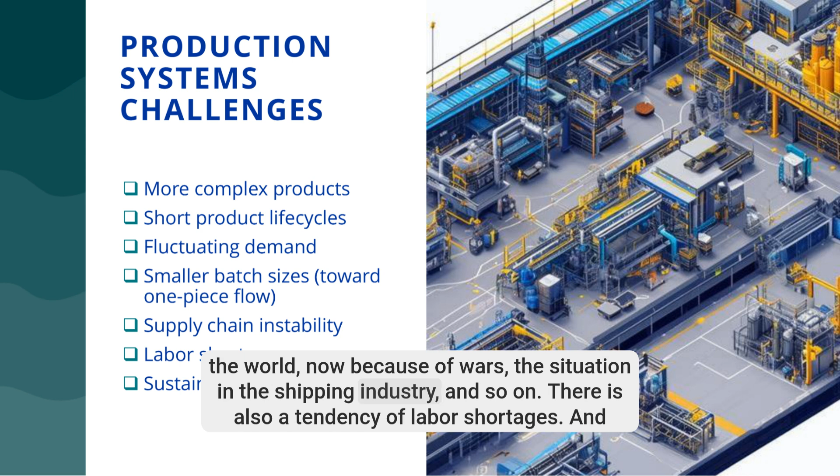Then we have supply chain instability, such as different disruptions of supply chains around the world now because of wars, the situation in the shipping industry, and so on. There is also a tendency of labor shortages. And finally, there is constant sustainability pressure, meaning how to make production systems even more environmentally sustainable.

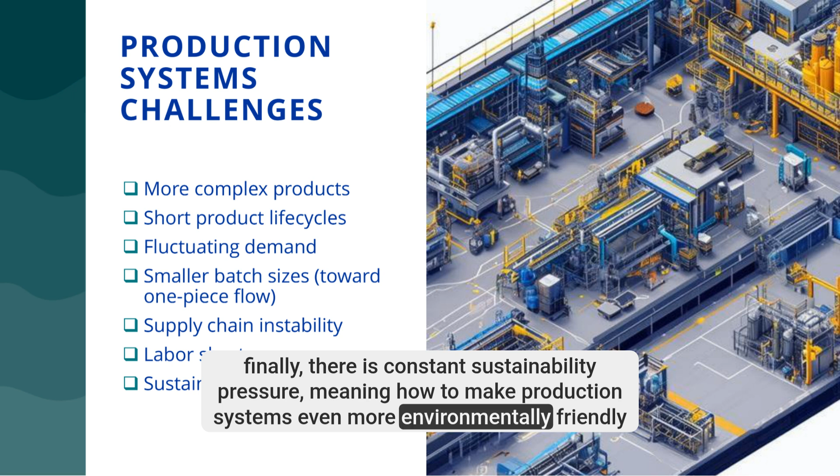So, to address these challenges, companies need to implement different technologies. These are mostly technologies that are trying to transform the system and make it more agile. And these more agile systems require a more skilled workforce, which also requires a good balance between cost, efficiency, and sustainability.

This is a great challenge, particularly for small and medium-sized enterprises, because they usually do not have enough resources to educate themselves, research, and analyze what kind of technology would be the most suitable for them, and in which way to adapt that technology. So most SMEs come to this challenge by trying to adapt themselves to the technology, instead of trying to find a technology that will really suit them and support their processes.

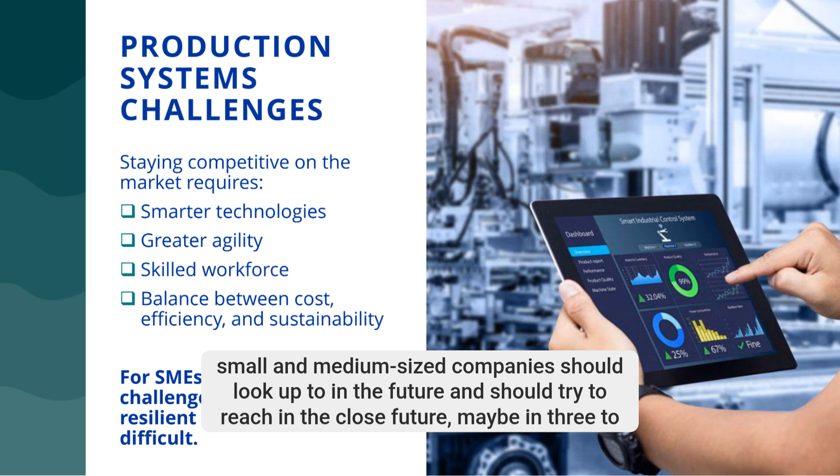One of the technologies that is currently among the top technologies on the market for optimization of production systems is digital twins. This is, I would say, not a completely new technology, but it is also not a completely market-mature technology. Today, mainly very big players on the market are using it on a daily basis. However, this is something that small and medium-sized companies should look up to in the future and should try to reach in the close future, maybe in 3 to 5 years, if they want to stay on the market.

So what does this digital twin represent? It represents a technology that enables companies to create completely virtual production systems that mirror their existing real production systems. All the changes and challenges they have in the real system can first be analyzed, tested, and optimized in the virtual environment, without jeopardizing worker safety and without spending too much money on technology before they test it. So it also comes down to test before you invest.

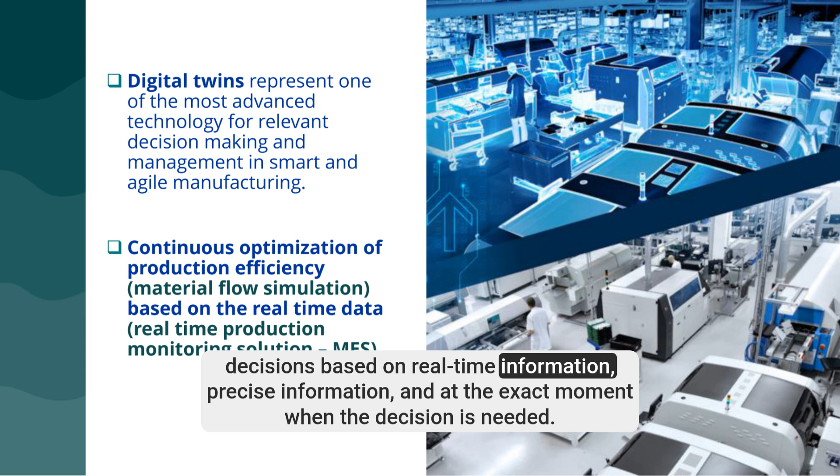They can really use these digital twins to change and examine different changes within the production system before making a real decision. At the same time, they can make decisions based on real-time information, precise information, and at the exact moment when the decision is needed.

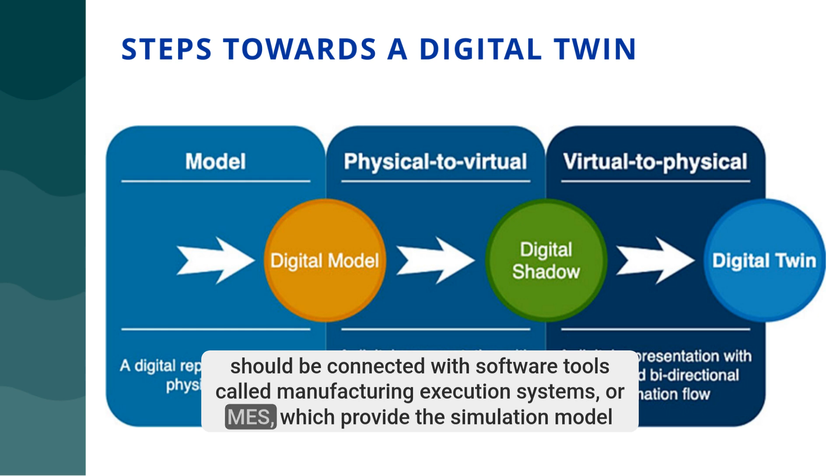To eventually reach a digital twin, a company should first start with a simulation of its production system. Later, this simulation should be connected with software tools called manufacturing execution systems, or MES, which provide the simulation model with real-time data. Ultimately, we want to have a real system operating, and a digital version of that system operating at the same time, exchanging information in real time.

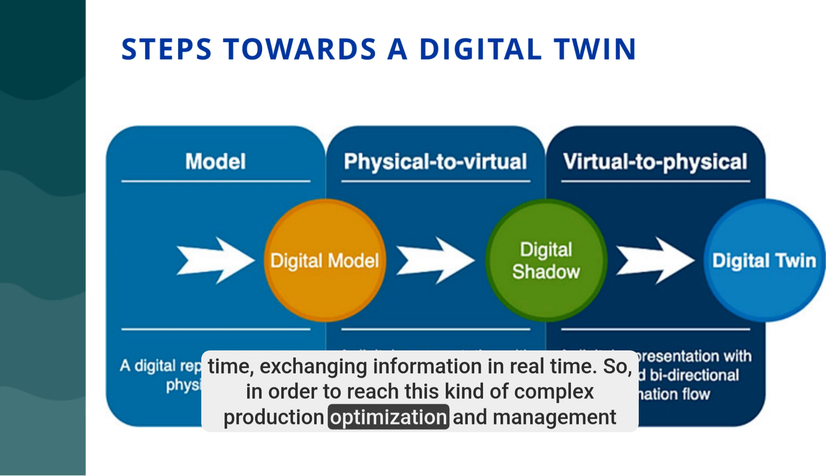So in order to reach this kind of complex production, optimization, and management system, the first step is to start by using material flow simulation to create a simulation model of the existing production and logistics system. This digital representation is first used by companies to understand how their system works, where the bottlenecks are, what the real challenges are, and how they can deal with different changes on the market and in the production system.

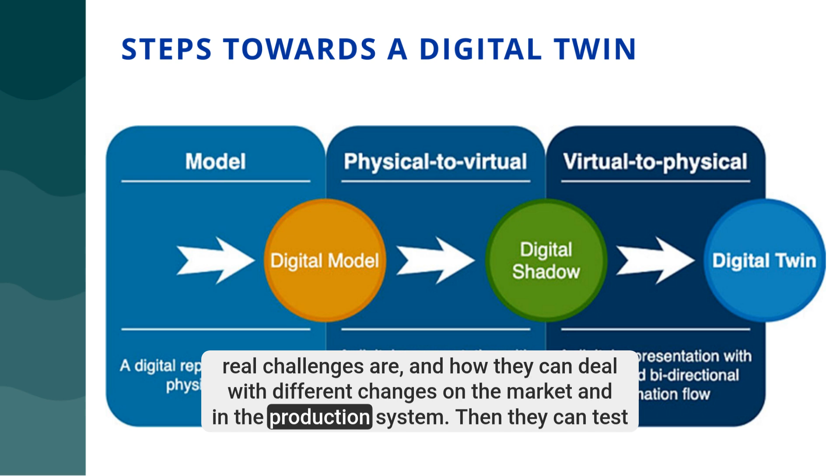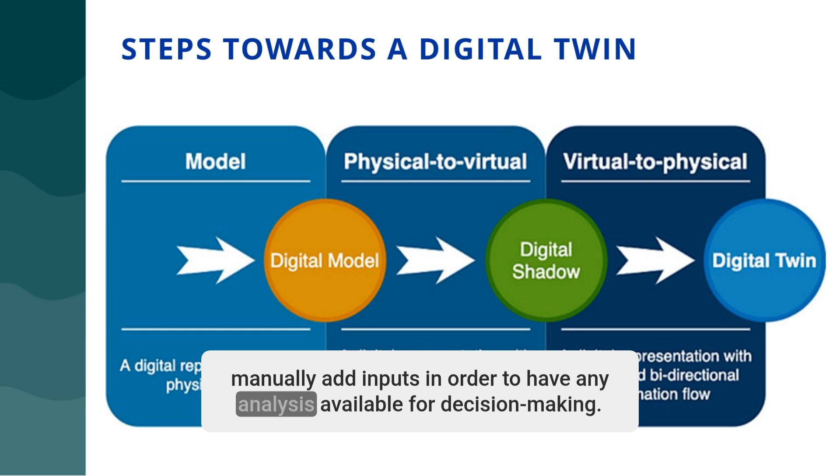Then they can test how their system would work in different scenarios. However, in this first step, when we create a digital model, we need to manually add inputs in order to have any analysis available for decision-making. This means that we manually input parameters into the system and then analyze statistically how the system behaves according to the parameters we put into it.

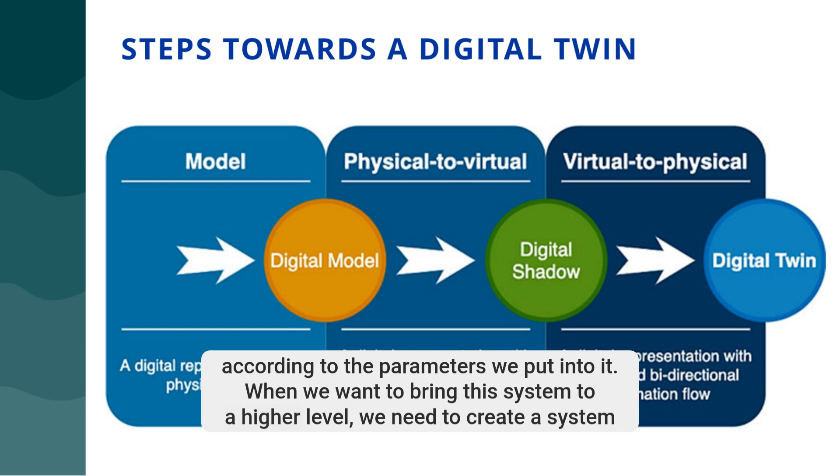When we want to bring this system to a higher level, we need to create a system that automatically takes information from the real system. For that, we need some kind of devices set up in the production system that send information in real time and feed our digital model with real-time data.

At that point, we already have something that is called a digital shadow. We upgrade our simulation model into a digital shadow once it works well, and once we can use it to monitor how the system works based on real-time data.

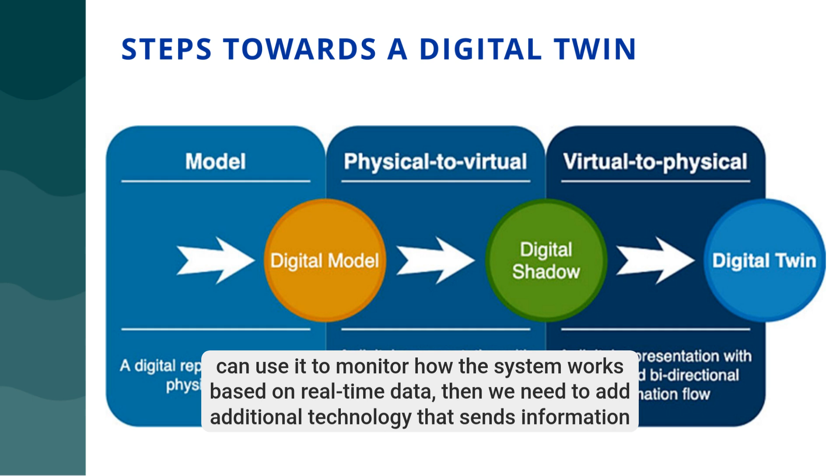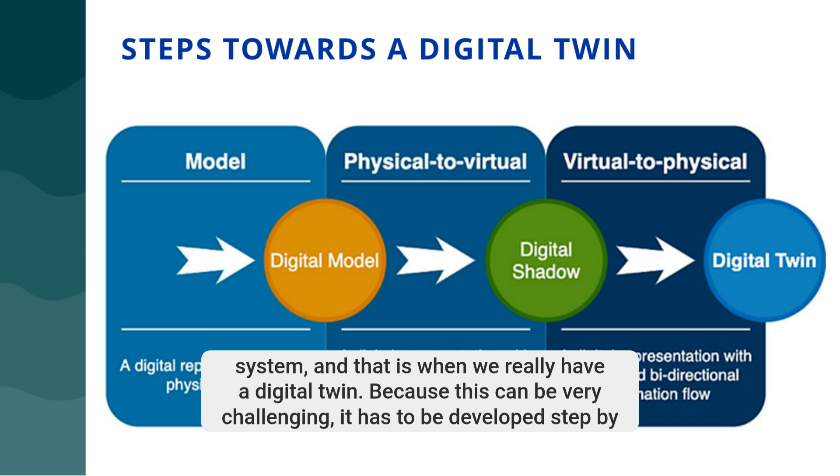Then we need to add additional technology that sends information from the digital model back to the real system. This creates a loop interaction between the real system and the digital system, and that is when we really have a digital twin. Because this can be very challenging, it has to be developed step by step.

Now we will start from the very beginning: how these simulation models are created, why they are created, how they look, and what they can help you with. The first step towards this kind of digital transformation is to create a simulation model.

This simulation model represents a digital representation of the real system. It can be used for production, logistics, or service-providing systems, so it can be applied in different kinds of industries. It can also be used for strategic, tactical, and operational planning of the system, for planning new systems or for optimizing existing ones.

That means you can create a simulation model of a production system that you already have, or of a new production line that you plan to implement in the next 1 or 2 years. The biggest advantage of these simulation models is that they answer the question: what will happen if?

This means that I can change a parameter in the simulation model and speed up the simulation process in 1 or 2 minutes. I can see what will happen with the system after 8 hours, 1 day, or 1 week, so I can evaluate how the changes I make now will influence my system in a couple of hours or a couple of days.

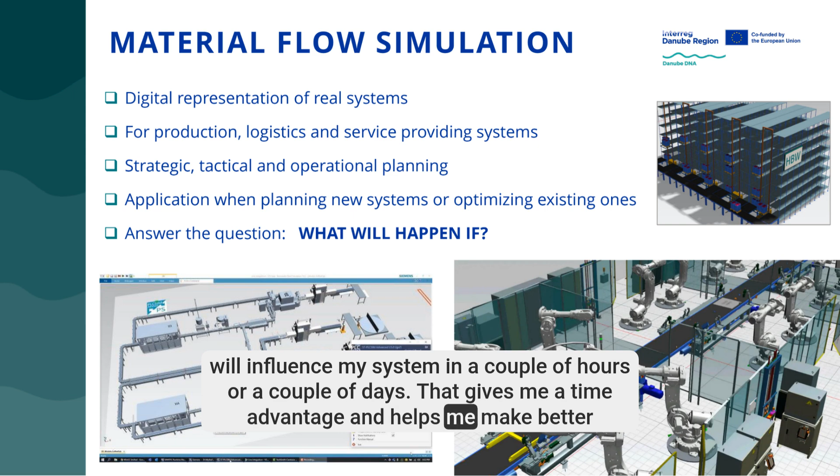That gives me a time advantage and helps me make better decisions, because I can already see how different decisions can influence my system.

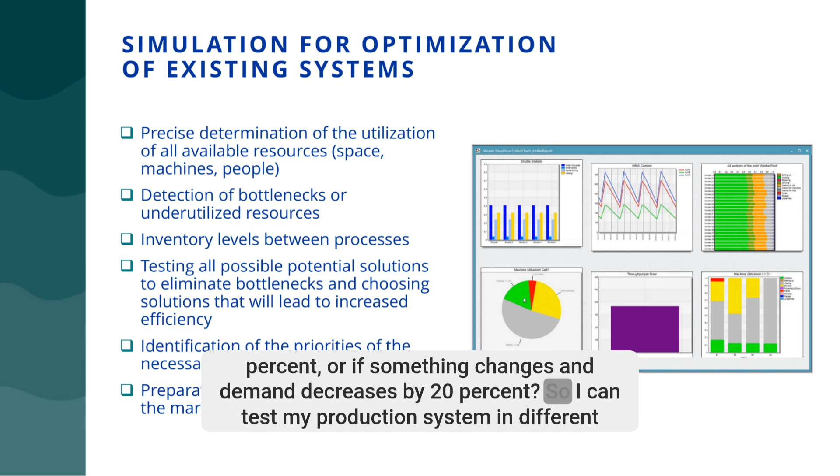Simulation can also help us prepare for extreme changes on the market. For example, what happens if demand increases by 30%? Or if demand decreases by 20%? So I can test my production system in different scenarios. Based on the simulation results, I can decide what backup plans I need to create in order to reduce the risk of problems on the market and increase my performance.

When I use simulation for new systems, the first thing I can use it for is the visualization of the conceptual solution. This means that you already have a plan of how your production system should look. But with the simulation model, you can really see how the system will look and whether you planned it correctly or whether some changes should be made.

Then you can optimize the layout. You can reduce the required space, set the machines in the right order, reduce the length of material flow, and optimize the system before you even start building it.

Simulation can also be used to compare different technologies. For example, if you have a production line and want to decide which packing technology would be the most suitable, you can test 2 or 3 technologies using simulation. The results can help you decide which technology will be most suitable in the next year, 3 years, 5 years, and so on.

It can also help you optimize the number of employees. This means that for the level of efficiency you want to achieve, you can determine the exact number of employees you need, and not only the total number, but also the specific qualifications needed for this kind of production system to work. So you can know, for example, that you need 5 engineers, 10 operators, 20 people in logistics, and so on.

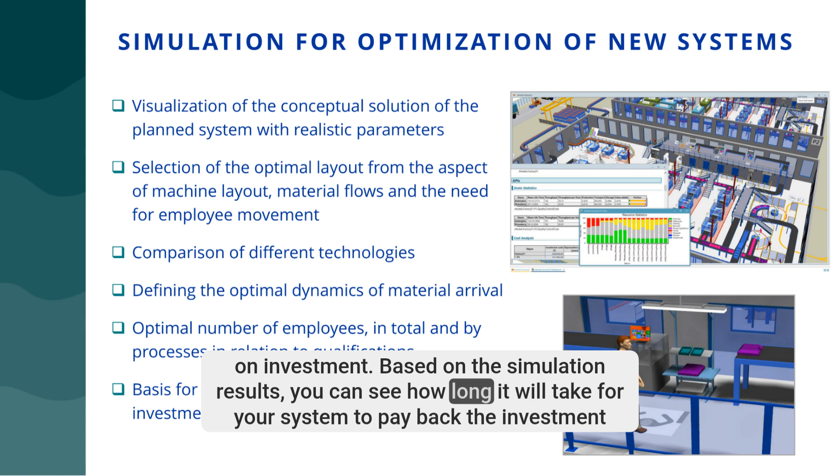Based on all this analysis, you can also create a very good basis for a realistic determination of return on investment. Based on the simulation results, you can see how long it will take for your system to pay back the investment required to set it up.

There are different software tools that can be used for creating this kind of simulation model. One of the most present and one of the best on the market is Tecnomatix Plant Simulation, offered by Siemens. This software helps you create a digital representation of any production or logistics system.

To analyze it, I will now open the software so you can see with your own eyes how simulation models of this kind of system look. Here I have an example of a simulation model. You can see that I can really work with this model - I can zoom in, zoom out, and see every specific element in the system.

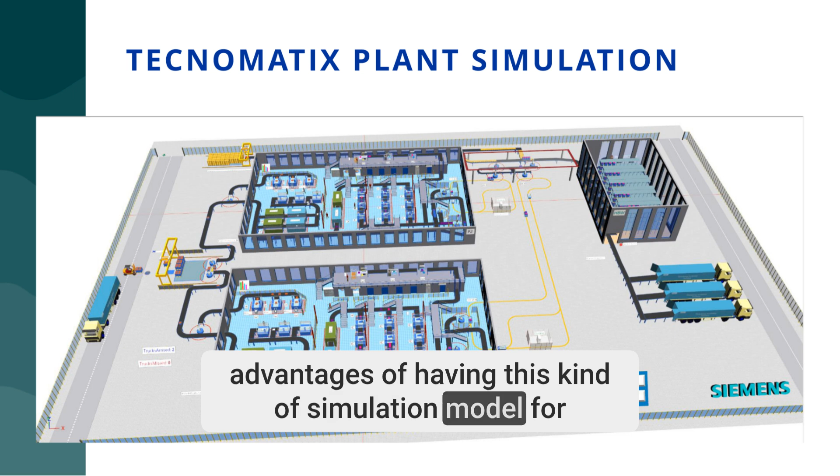One of the key advantages of having this kind of simulation model for a production system is the event controller, where I can speed up the simulation. For example, if I reduce the speed, the system starts and everything moves in real time. However, I can also speed up the process, and then the simulation runs much faster. I can let the simulation run for a couple of minutes. In less than one minute, the system simulated more than 52 minutes of work - so in less than one minute, I can see what happens with the system in one hour.

Now I can really see how each element of the system works. I can introduce different charts where I can see the efficiency of each element. I can enter each machine and see its efficiency - how much it is working, how long it is waiting, whether the material flow on this machine is blocked for any reason, how many pieces were produced during that time, what the average processing time was for each piece, and so on. So I can really go deep into the system and analyze many details.

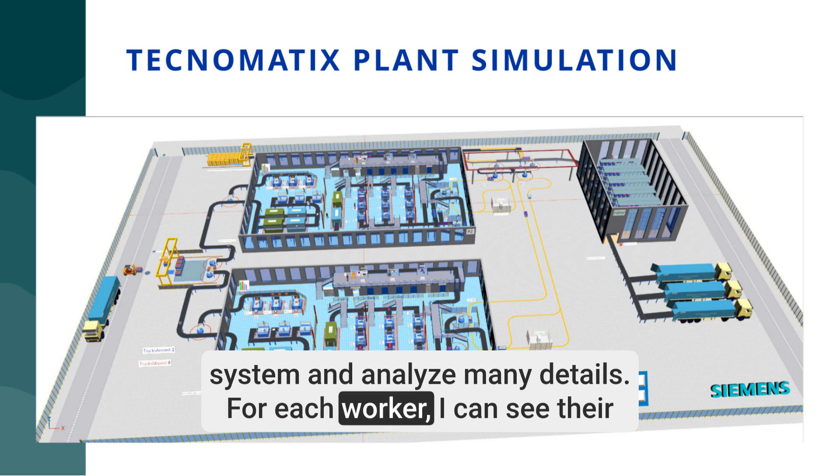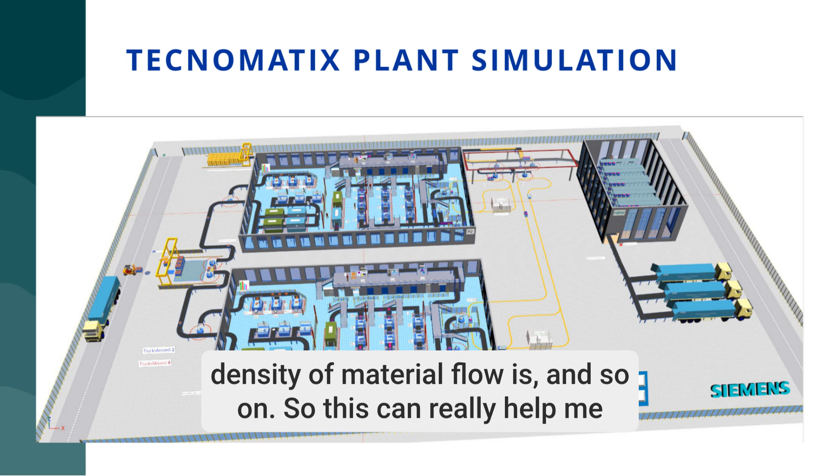For each worker, I can see their efficiency, and even how much distance they walked during a specific time. I can also see the pathways that workers used and where the highest density areas are - this can help me with layout planning. I can also see the flow of material, where the highest density of material flow is, and so on. So this can really help me understand how the system works.

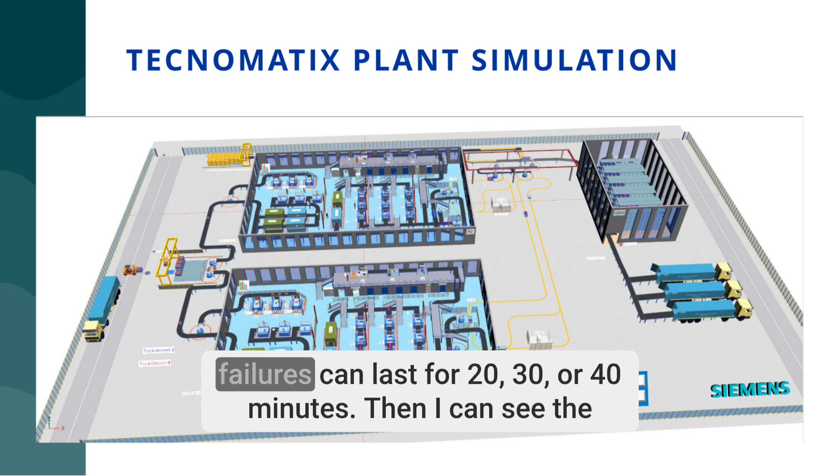I can then enter the system and change the parameters of each element. For example, if this machine was working with a processing time of 13 seconds, I can ask what will happen if I change this from 13 seconds to 20 seconds. Then I repeat the simulation and see the influence of changing any parameter on the system - whether it increases or reduces my efficiency. I can also set that the machine has certain failures, or that repairing these failures can last for 20, 30, or 40 minutes. Then I can see the influence of each of these failures on the system, and how the failure of one machine influences the material flow through the entire production system.

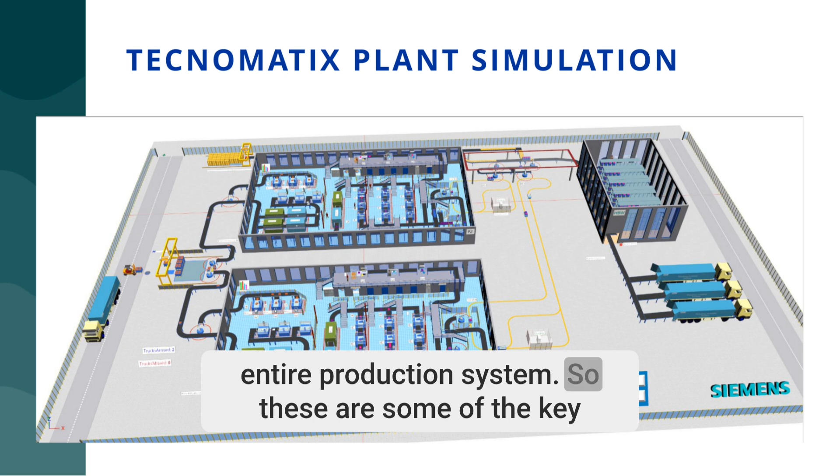So these are some of the key advantages of simulation models.

This is something that has become very present on the market and very affordable. Even in Serbia, there are now many small and medium-sized companies that use simulation models to understand their systems, analyze them, and plan new production systems. So this is not really a technology that is out of reach for small and medium-sized companies - it is very present, available, and affordable.

The challenge is that the simulation models should be created by professionals who are very familiar with the technology and who can create models that really provide quality information. The biggest challenge with this kind of model is that if you put garbage information in, you get garbage out. That means that when defining the parameters of the system, such as the frequency of truck arrivals, the processing time of each machine, the number of workers, their skills, the layout of the production system, and so on, you need quality input information in order to get useful results. If you use imprecise information, the results cannot really be reliable.

This brings us to our next topic for today. In order to fill this kind of simulation model with precise and relevant data, the best option is to use a system that provides real-time insight into how your machines and your system are working. These systems, used for real-time monitoring and management of production systems, are called manufacturing execution systems, or MES systems.

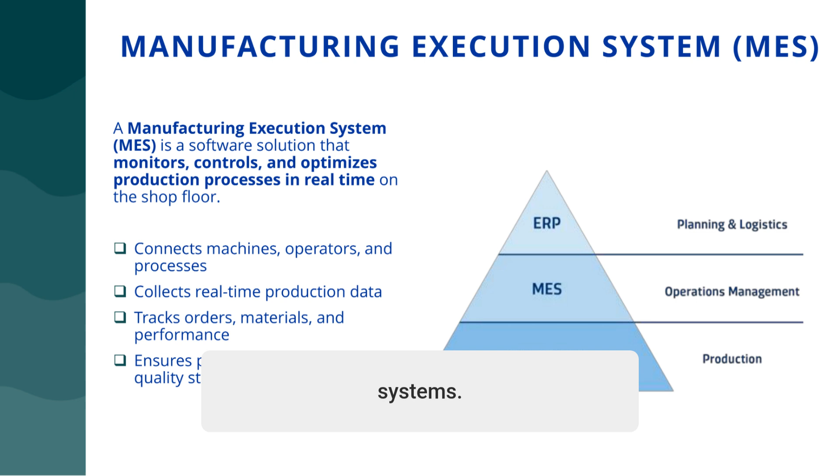Today I will show you an example of a MES system. It is called DigiPro MES. DigiPro MES is a solution developed by a startup company in Serbia, and experts from our faculty also participated in the development of this solution.

I am showing it to you today because it is software dedicated to small and medium-sized companies. It is available on the market at a price that is affordable for SMEs, so this kind of system is available even for companies with 10, 100, or 300 employees.

So how does this DigiPro MES solution work? It takes work orders from the ERP system and then generates specific work orders for each activity in the production system. For example, it creates a work order for the tool shop to prepare the tool that should be set on the machine. It also sends a work order to the logistics department to prepare the material for a specific product and bring it to the right machine at the right time.

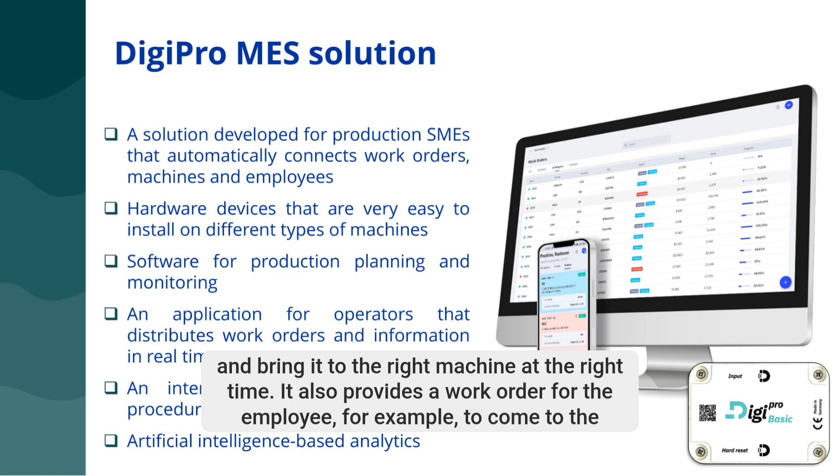It also provides a work order for the employee, for example, to come to the machine, set the tool, and start production of a specific product.

The hardware is installed directly on the machines and collects data about machine cycles and production activity. It works independently from the machine's internal control system, so it can be used on different types of machines, from different producers, and on machines of different ages.

The hardware collects real-time data from the shop floor and sends it to the software system for monitoring, analysis, and work order tracking.

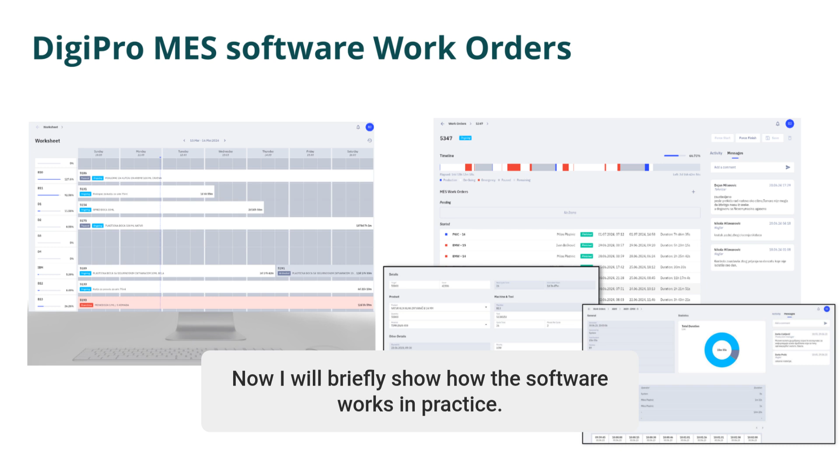Now I will briefly show how the software works in practice. This is a real-time overview of a production system in one SME in Čačak, Serbia. Here we can see the machines, active work orders, production status, cycle time, number of produced pieces, and current machine activity.

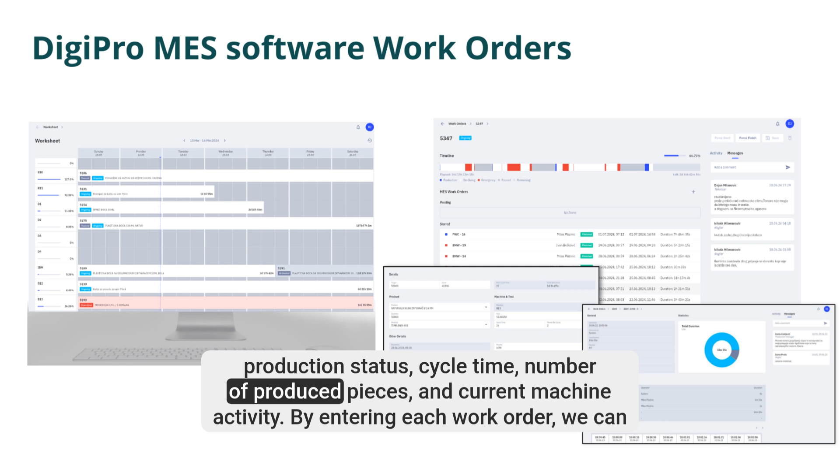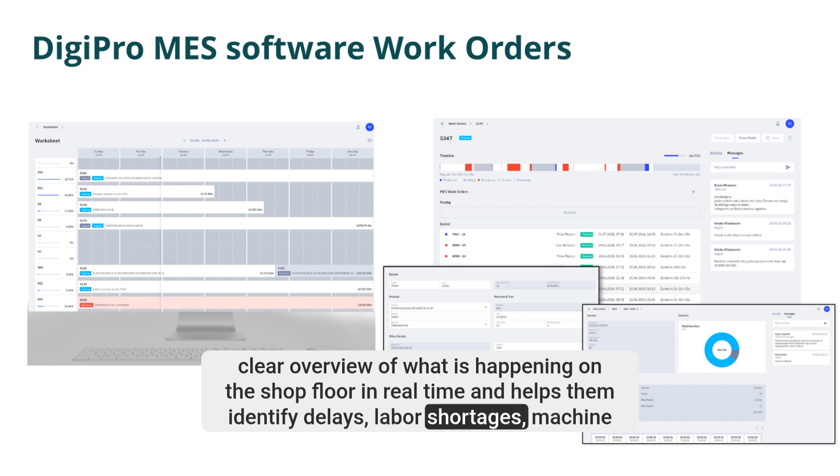By entering each work order, we can see all related activities, delays, quality controls, responsible operators, and how long each action took. This gives management a clear overview of what is happening on the shop floor in real time and helps them identify delays, labor shortages, machine issues, and opportunities for improvement.

The software also includes AI-supported analysis, so it can answer questions such as which operator was the most efficient or which machine had the longest delay.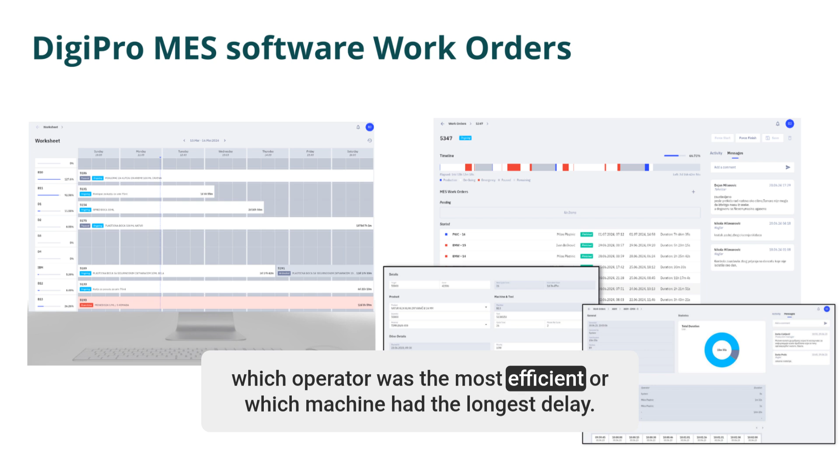Let me now explain you in more detail how the system works. Through the application, the operator receives all important information: what needs to be done, on which machine, what the problem is, and what the current status is.

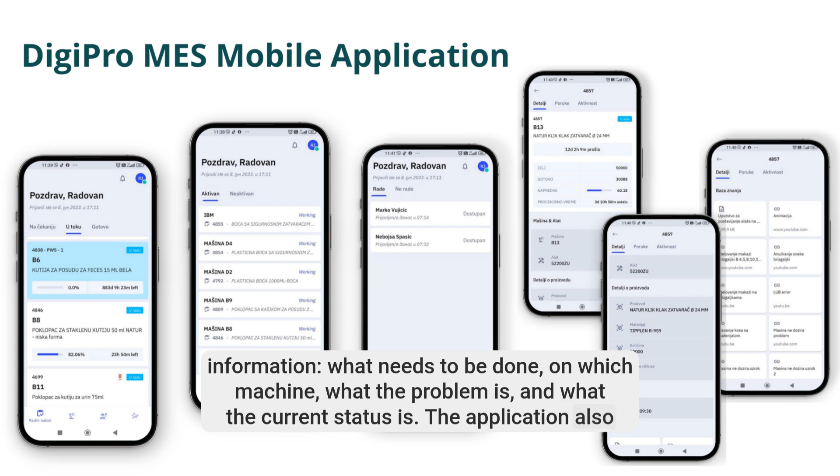The application also includes a knowledge base with work instructions, standardized procedures, videos, and problem-solving materials. This helps operators solve problems independently, even during night shifts or when more experienced colleagues are not available.

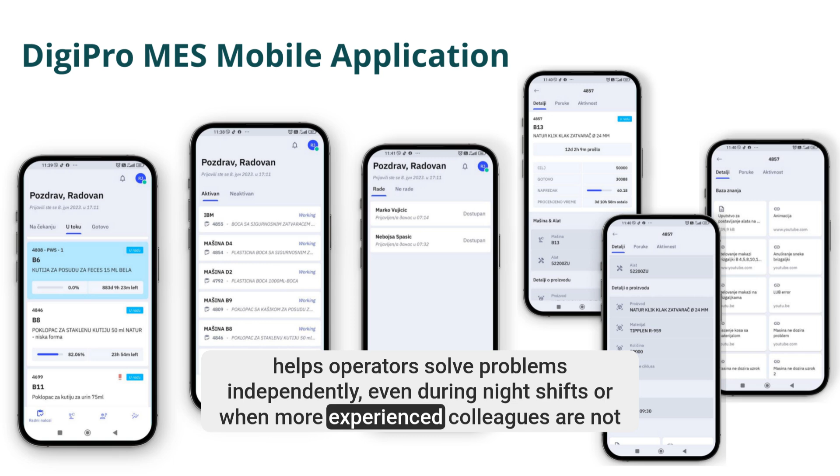A good practice case study is the company you saw on the screen, where this system is implemented. This is a company that we as a faculty worked with. They had certain challenges - they produce plastic bottles and boxes for the pharmaceutical industry.

During the COVID period, their demand increased by 80% in one year. Because of that, they had to find a way to use their capacities in the best possible way, so they hired us to create a simulation model for them.

That is why they decided to implement the DigiPro MES system. DigiPro MES was implemented and started sending them real-time information. We integrated the simulation model with the inputs from the DigiPro system. Now they have a kind of digital shadow that they use for production planning and decision-making. This significantly improved their system.

One of the most important indicators is that when they started working with us and when we created the simulation model, they had around 50 employees. Now they have 80, so in about 2 years they almost doubled their capacities. They also increased the number of machines and the number of people, and they more than doubled their yearly income by applying these technologies. I would say that these systems really optimized their production and increased their efficiency. The return on investment for these two systems was less than 1 year.